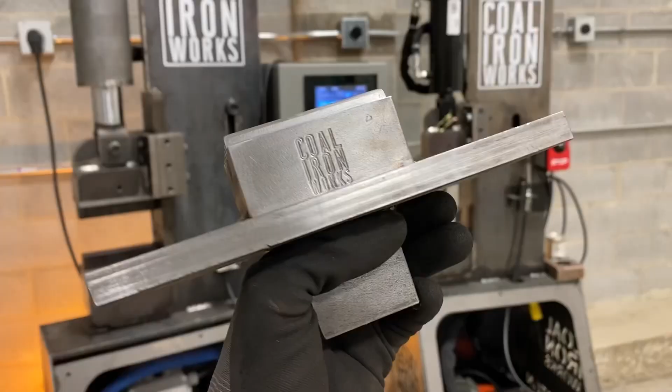Perfect. And we are also going to be doing the ladder pattern on these, correct? Yes. We're really excited to try out Coal Iron Works ladder dies, so we wanted to give that a try while we were here. Awesome. So this will be a nice featurette of how our ladder dies can be used on pattern welded steel. You guys have a 16-ton press of ours, correct? 16-ton, yeah. So we've got both a 25 and a 16-ton out here, but today we'll primarily be using the 25 to get some speedy, efficient work done.

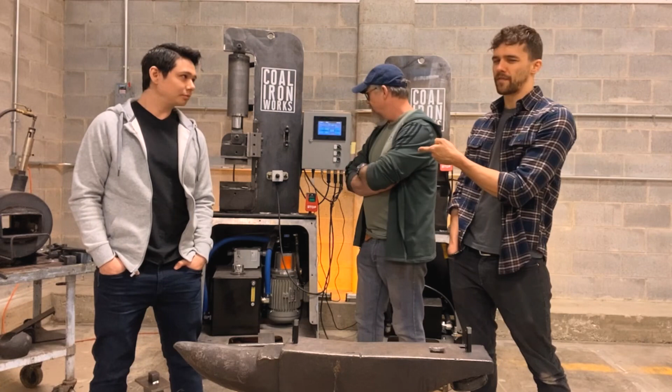I'm super stoked. The design looks beautiful. So before we fire up the forge, let's go over to the chalkboard. You guys can break down the game plan for the steel, and we can look at that beautiful sketchbook of your designs, and we'll get to work from there. So thanks for watching. Let's get to work.

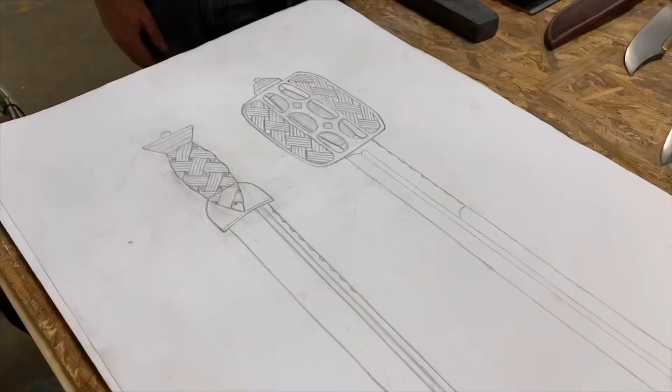Awesome. Let's go. So we got an order from one of our repeat customers who is looking for a Scottish basket hilt sword. We're trying to get something that has matching elements to it, like the patterns here. Dale came up with the design, so I'm going to let him walk you through it. So with dirks, this is a pretty standard pattern on the handle. This is kind of a basket weave pattern going up the wood.

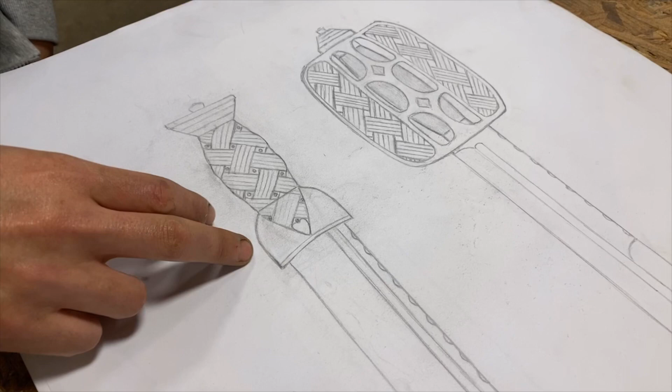This is a brass pommel and a brass guard up here, and the carving will go into the actual brass guard. But I wanted to mimic this basket weave pattern in the actual basket guard of the sword. It won't be 100% traditional because it is going to be Damascus, so he wants a little bit of creativity in it, and we don't have to stay 100% accurate to the time period.

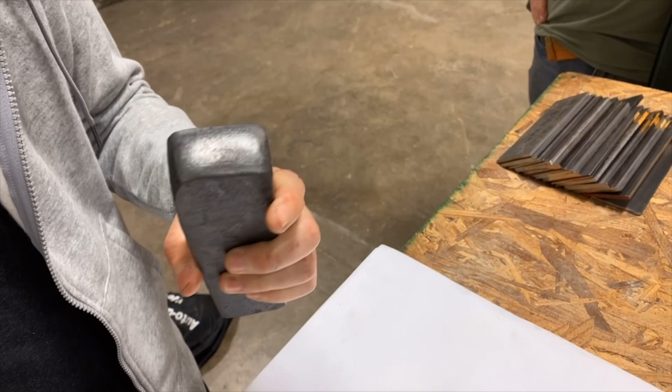So before I came here, I made this billet of Damascus right here, which is 144 layers. It started out as 18 layers of 1084 and 15N20 with 3 different thicknesses of each, and then it was cut and stacked 3 times to end up with 144 layers.

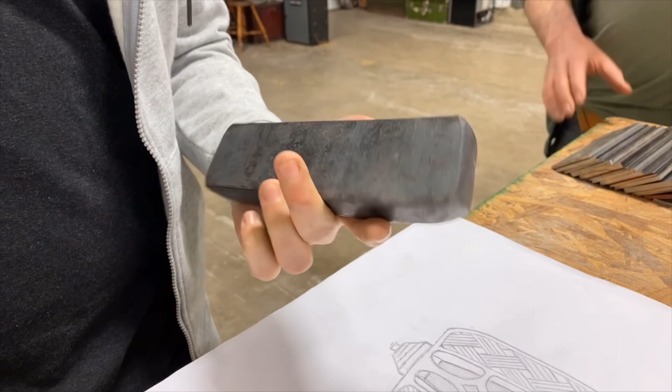So this is going to be the steel for the dirk, probably more than I need, but I always like to forge more Damascus than I need so that I don't have too small of a billet at the end of the day.

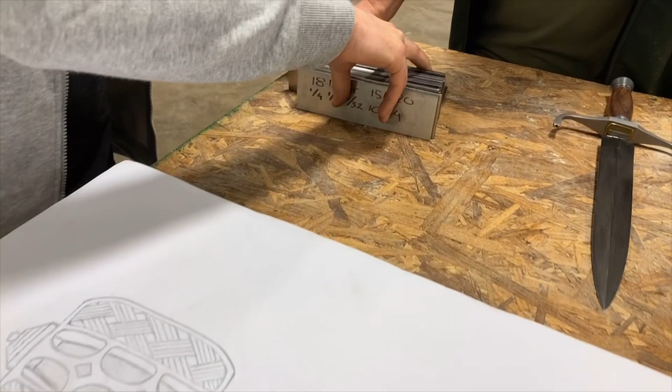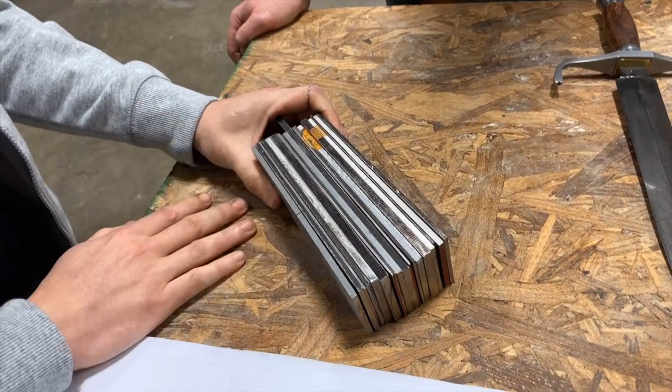And just to kind of show the process that we needed to get to this, we are going to forge up another billet of Damascus. This one's slightly bigger, but this is the same number of layers, the same type of steel and thicknesses of steel, just to show the process that we had to go through to get to that first billet.

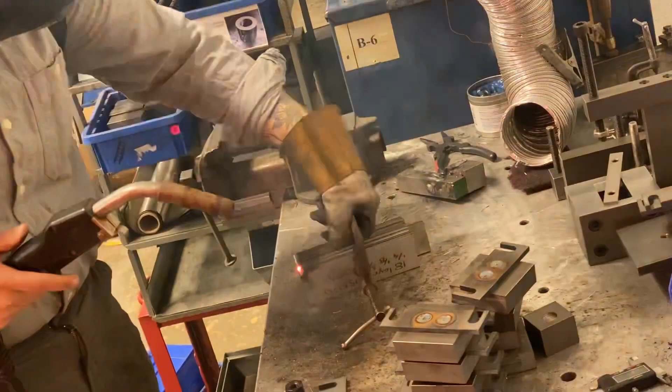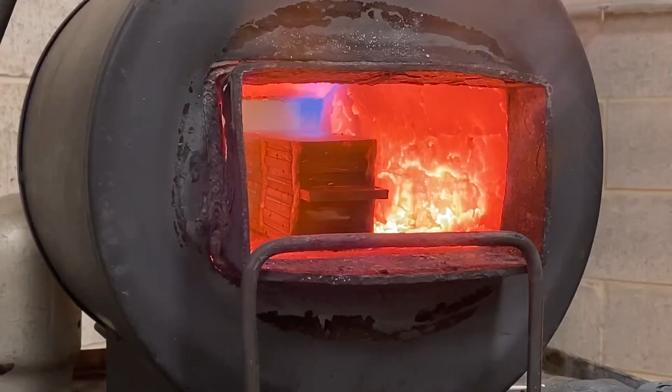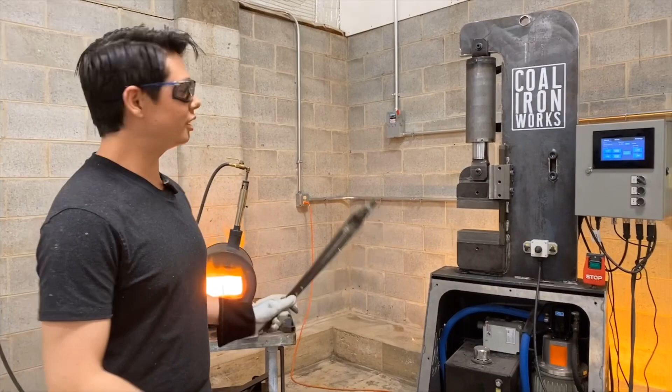All right, so the steel should be about hot enough now. It's kind of an orange color, which is what we're looking for. So my plan is right now I'm going to take the steel out, take it over to this 25-ton press with these large flat dies. I should be able to get it all pressed in just one go. And then once it's out of the press, I'm going to bring it back over here, put some more borax on it, flux it up, and then stick it back in the forge.

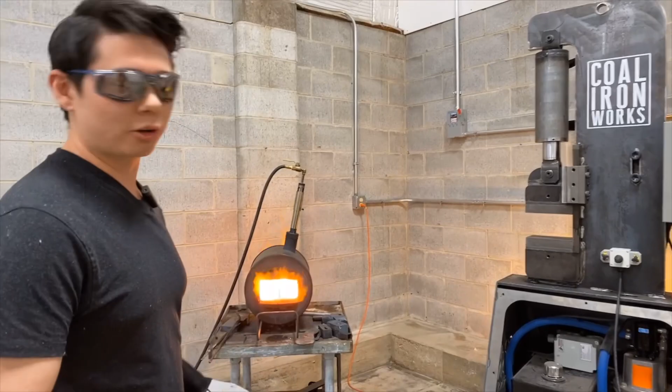Salt Bae energy happening there. You know Salt Bae? The guy who's like that.

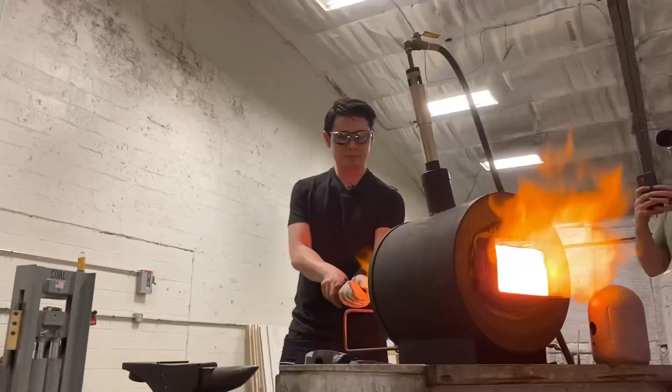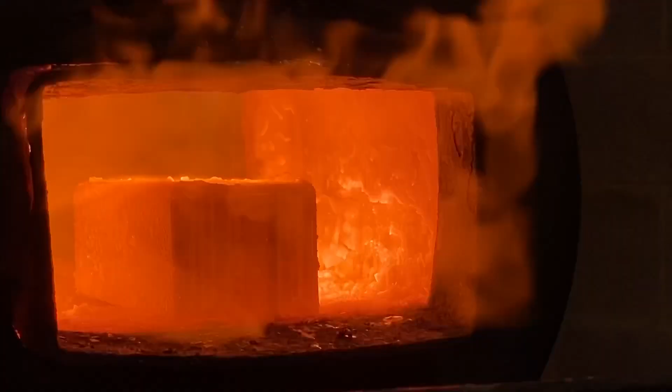All right, so I got a nice set on the weld, so I'm going to go ahead and wire brush it off and then just go in little by little so I can start getting a deeper press on it.

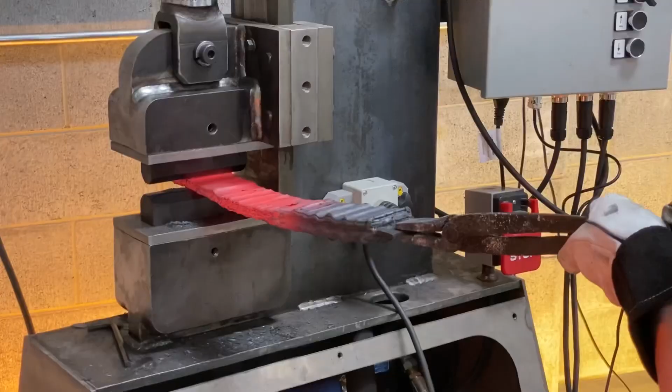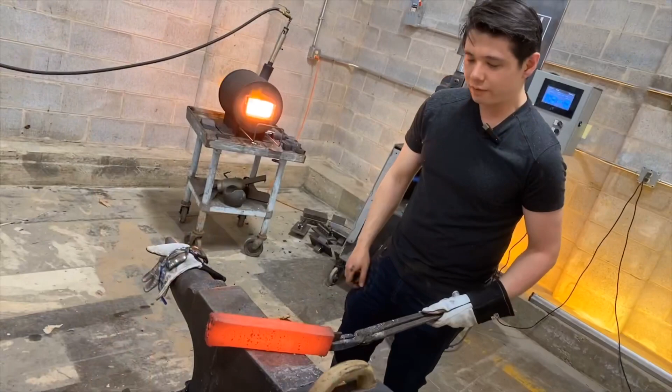All right, so I've got it forge welded and gotten down to the size that I want it before cutting and stacking. So what I'm going to do now is make sure it's perfectly flat, so that when I cut and stack it and mill across it, there won't be any extra loss of steel. So I'm going to put the large dies back on there, take it in from the side, and get it nice and flat.

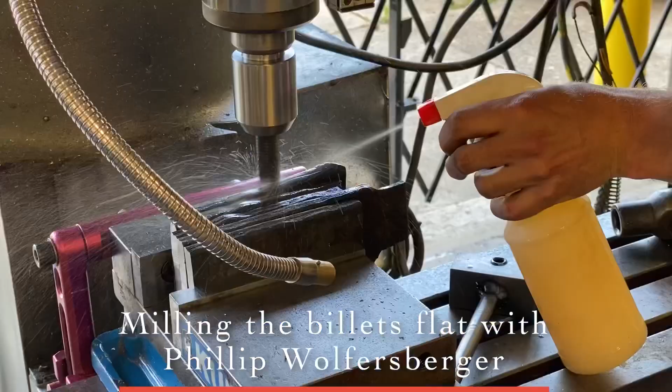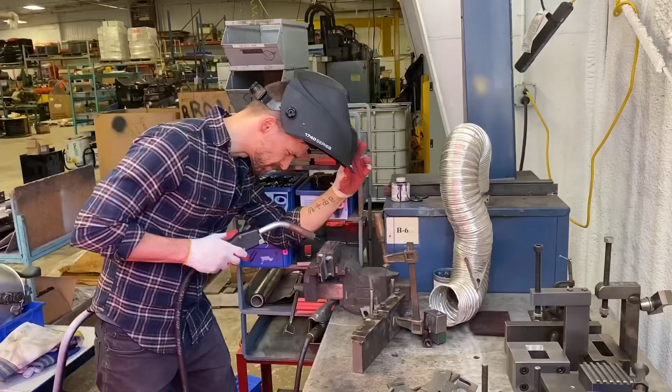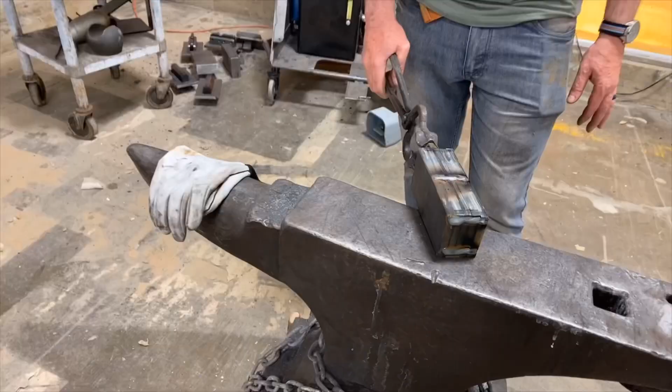Okay, so we're going to switch over. Dale's been working pretty hard this morning. Dale got this drawn out to about 28 inches. We cut it in 5 pieces. We took it over to the milling machine, cleaned all the sides up real well, got it welded up, and now we're going to stick it back in the forge and draw it back out again.

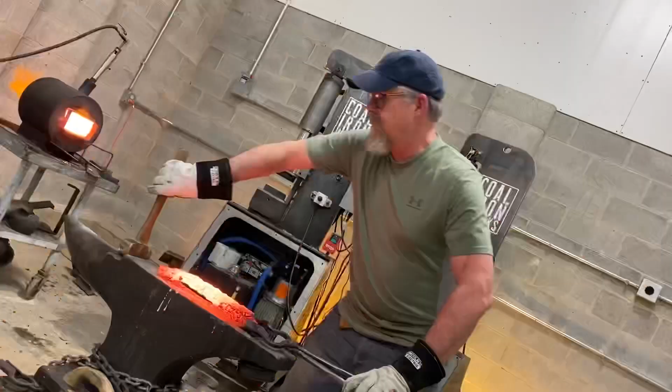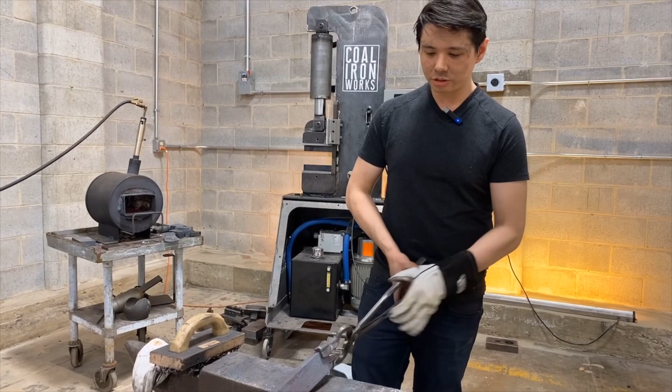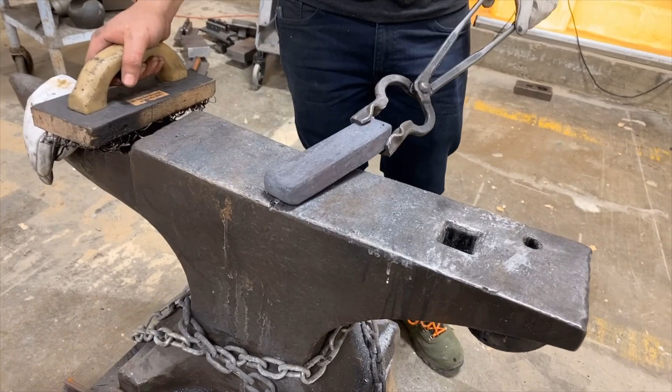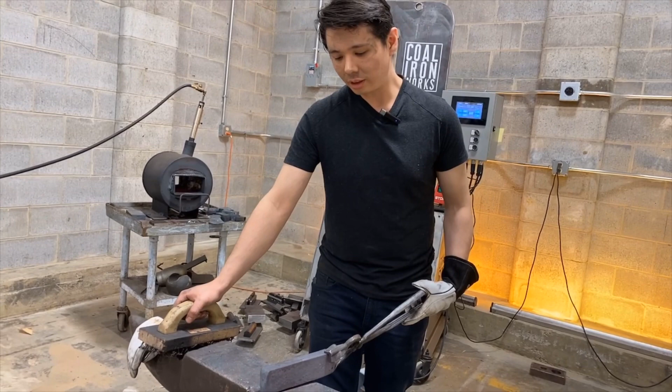All right, so now that we've kind of walked through how to get to this point, this is the 144 layer billet that I already had. So I'm going to go ahead and start getting this worked down to make the blade of the dirk. So I'm basically going to work it down to close to the thickness that I'm going to need, and then I'm going to start using the ladder pattern dies and work the pattern into the steel.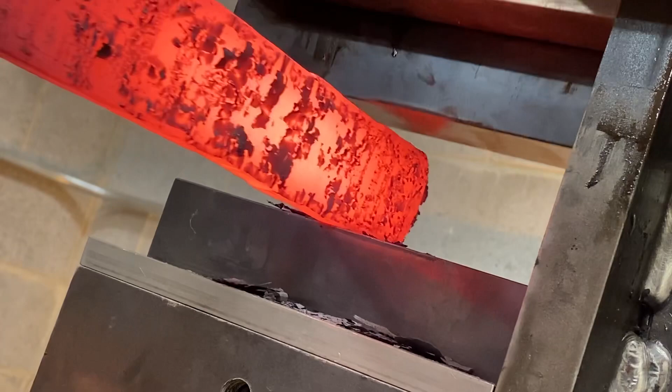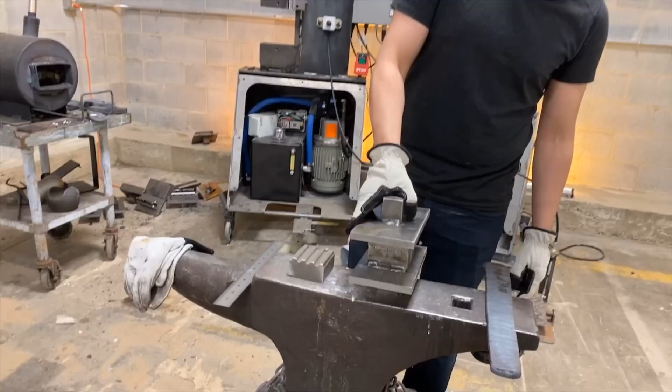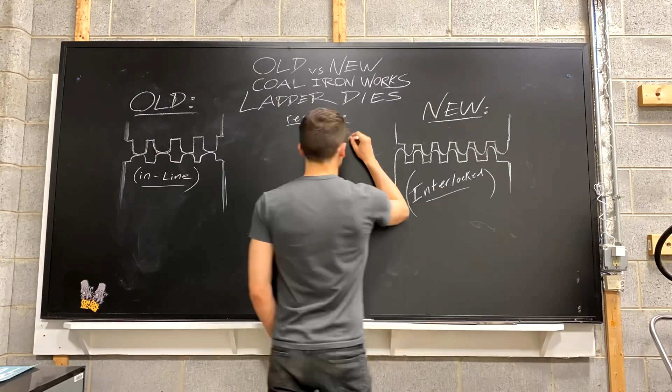All right, so now that I have this kind of down to a good thickness to start patterning the steel with, I'm going to go ahead and use Coal's new ladder dies. So I want to talk about these a little bit because I think they are awesome. This is Coal Iron Works' new and improved ladder Damascus dies. This is their old set of dies, and as you can see, the new pattern has a tighter ladder pattern, gives you a little bit of a tighter pattern on the steel itself, and also requires less grinding of the steel at the end of the day. Obviously, if you have these old ladders, they're still great. They still give you a great ladder pattern, and are perfectly usable as well.

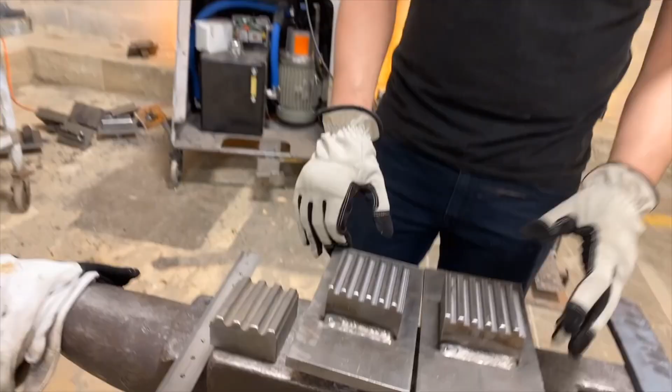So with ladder pattern dies, a lot of you that have made ladder pattern Damascus in the past, you're probably used to grinding in your ladder pattern and then forging flat. This is kind of the opposite approach, where you're basically taking a flat piece of steel, you're pressing the ladder into it, and from there you kind of have 2 options. You can then grind it flat, kind of the opposite of the previous approach, or you can press it flat and get a slightly different pattern at the end of the day.

If you grind it flat after pressing the ladder in, then you'll get your typical ladder pattern where you kind of have lines going up and down the steel that most people are familiar with. If you press it flat after pressing in the ladder, then you're going to get more of a wavy pattern, kind of a water-like pattern that's a little bit more natural feeling. So it's really up to what you prefer, what your customer might prefer. My plan is to press it in and then press it flat without doing any grinding. I'm looking for more of that natural water flowy feel to my pattern Damascus. So let's go ahead and do it.

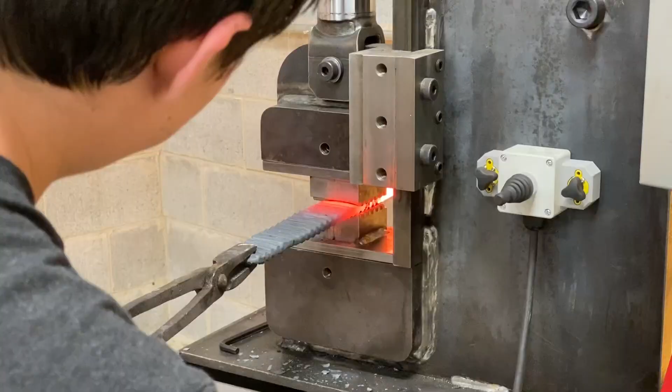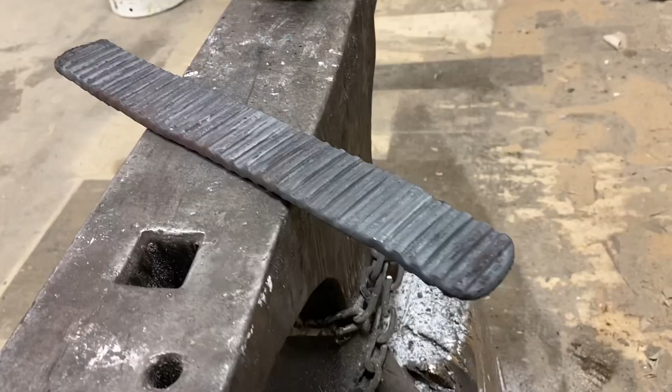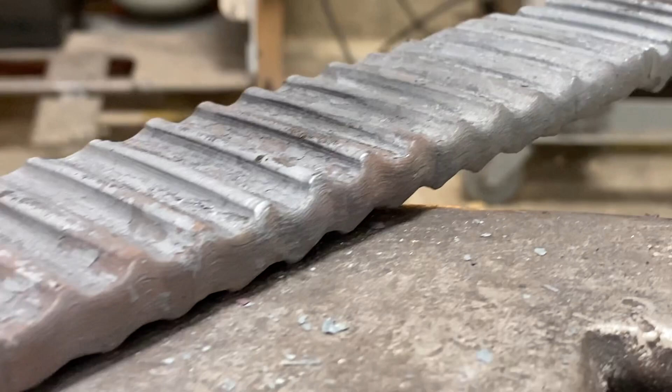So here is the laddered out steel. I basically tried to get it to where it almost looks like an S going all the way down the steel as far as the depth of the ladder patterning. So like I was saying before, from this point you could grind this flat. If you started with your steel thick enough, you could grind this flat and then have that typical ladder pattern that a lot of people are used to. I'm going to press it flat from here and get that kind of wavy pattern that I was talking about.